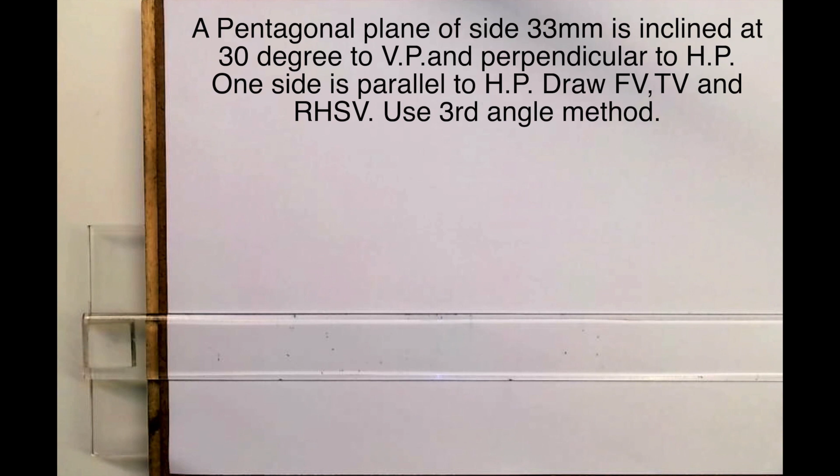Use third angle method. So when the plane is inclined at 30 degree to VP, first we will draw parallel to VP. So front view will give you true shape. So in this case, pentagon will come down and one side is parallel to HP. So one side of the pentagon will be parallel to XY line. You can use any method to draw a pentagon.

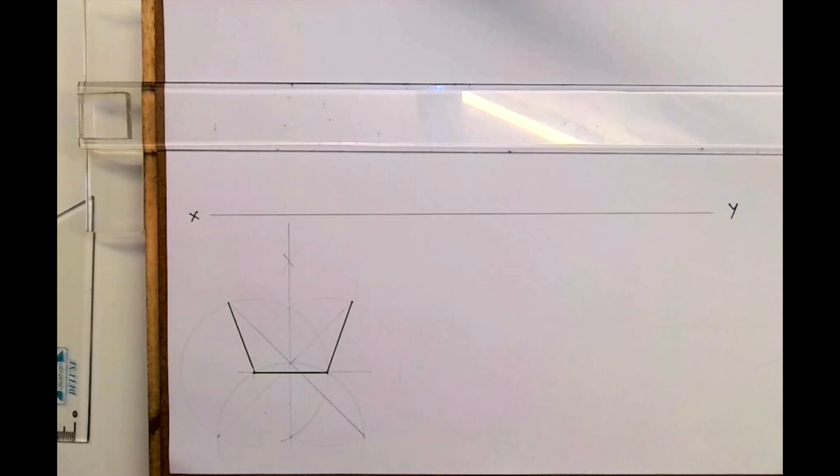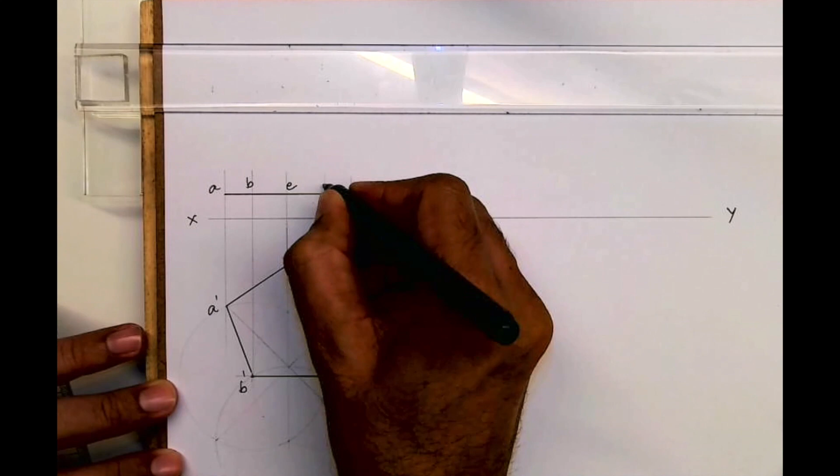Now after drawing front view, you can project all these lines up, and at any distance you can draw horizontal line. So that is top view. So generally we say front view, top view, right? A dash, B dash, here I'm writing dash, here without dash. Generally we write front view, top view, but it is reference view.

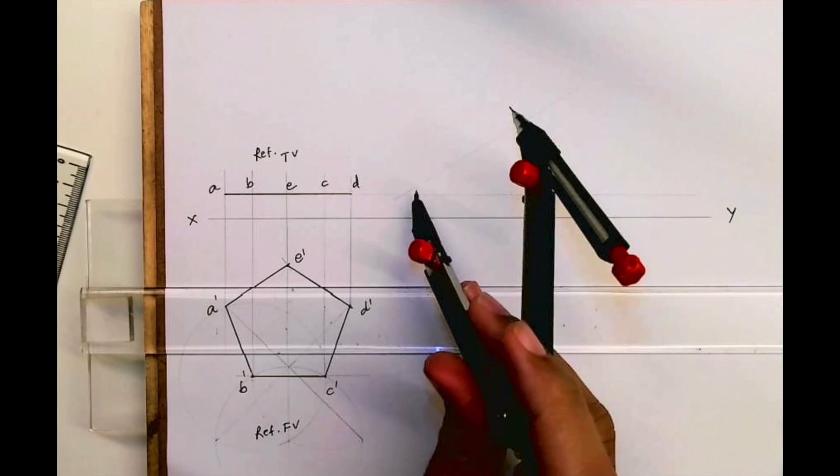Remember that. So don't get confused, because we need to draw a pentagonal plate at some angle. Here it is 30 degree. So we can't draw directly inclined. So that's why we draw reference view. And then we'll cut distance on it. We'll mark A, D, and then we'll mark respectively B, C, and E.

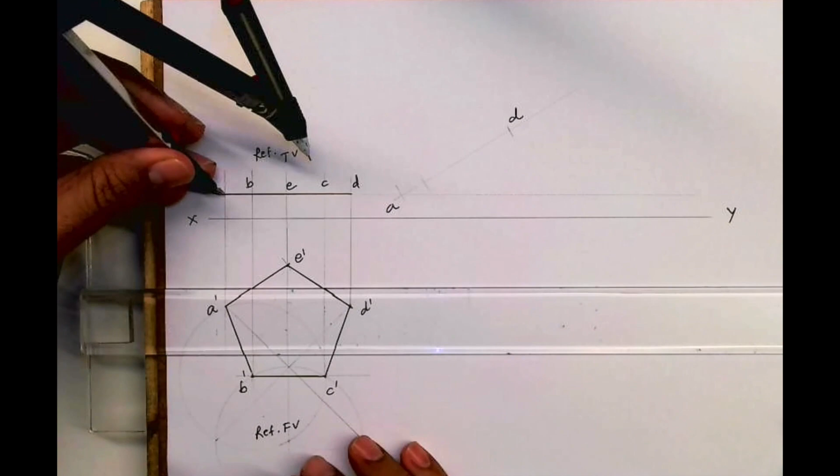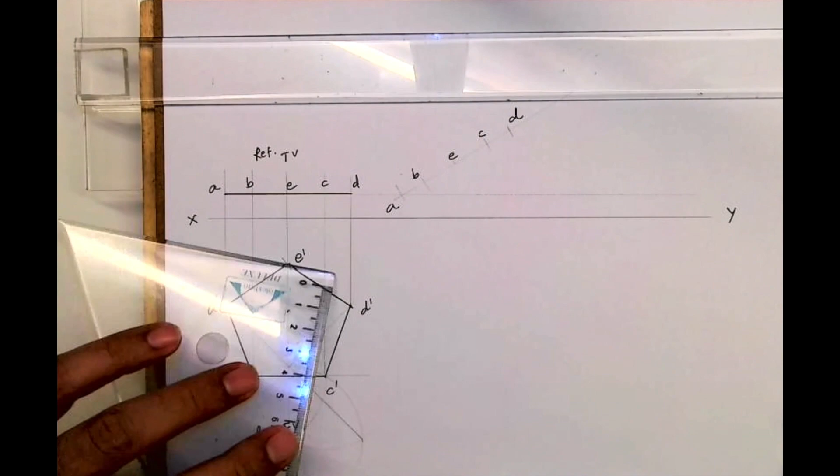So this is how you'll get A, B, E, C, D. Then you project this down. A, say you draw vertical line. B, E, C, and D you draw vertical line. And from here you draw horizontal line.

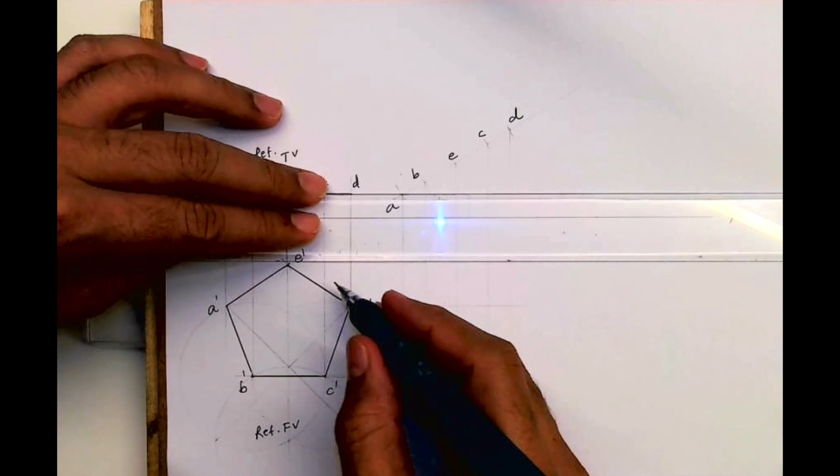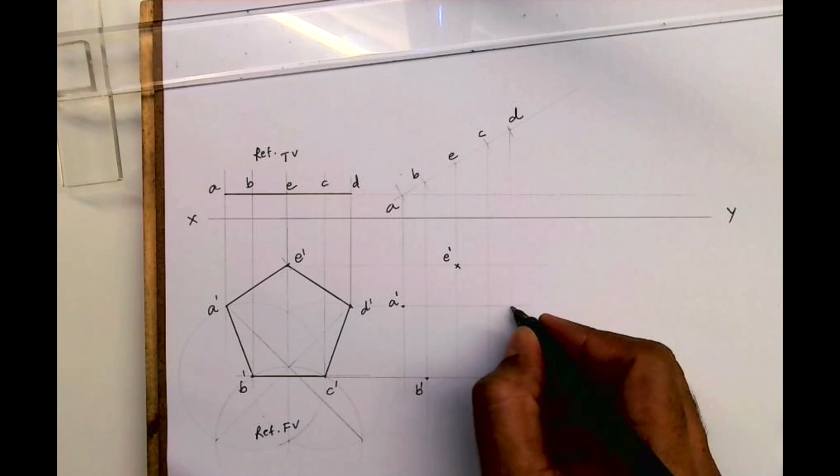So wherever they intersect, A from here, A dash from here, A dash, B, B dash, E, E dash, C, C dash, D, D dash. So you'll get 5 points. And when you join them, this is top view. And when you join all these 5 points, you'll get front view.

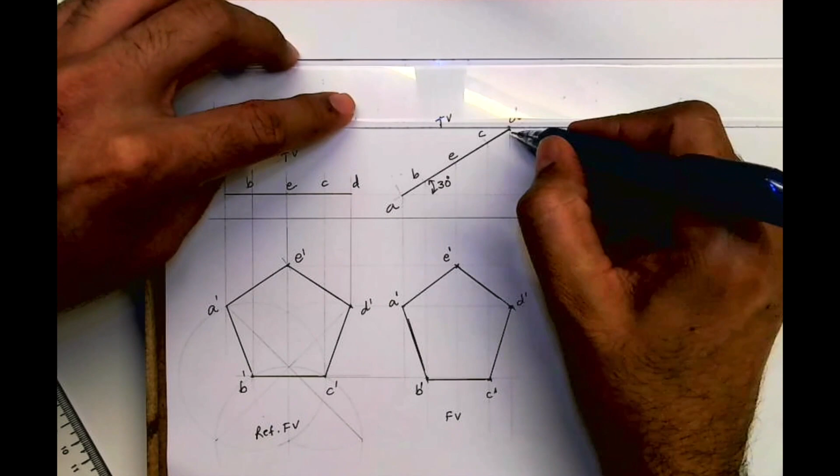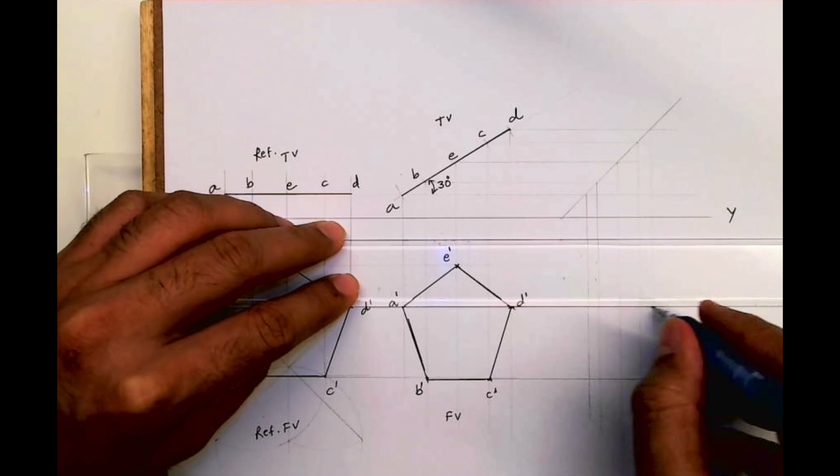After that, we'll draw 45 degree, because we have to draw right hand side view. So draw 45 degree and project all the points, top view points over there, and then you project vertical. Here also same concept, respectively, whichever points are intersecting with the front view point. See this, you draw line from front view also.

So D from here, D dash from here. So that is D double dash. This is C double dash, E double dash, B double dash, and A double dash. So this is right hand side view. So now we need to join this. I hope you people have understood this.